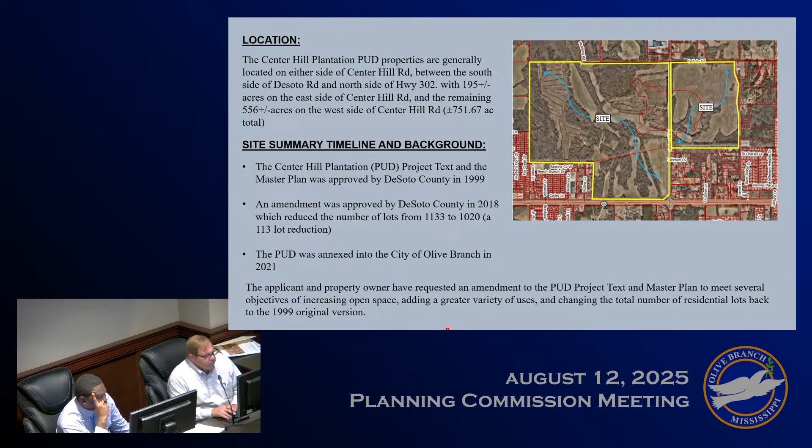I'll continue with the site summary timeline and background. So there has been no development in Center Hill Plantation since its 1999 approval and the 2018 amendment. But with the post-annexation extension of central sewer to the area, development is expected to commence within the next several years.

However, the full program is expected to extend over many years in multiple development phases and will be dependent upon market conditions. It will be further regulated through the city's subdivision procedures, where streets and utilities will be installed and lots platted to allow construction of new homes and businesses. So, what is the summary of the proposed amendment?

Unlike conventional zoning, a PUD project text serves as a unique development code for a project by setting forth permissible uses, bulk regulations, and other standards, such as architectural, to coincide with a PUD master plan. In the case of Center Hill Plantation, these standards are applied to 3 different parts of the overall project.

So Area 1 is right here, here's Goodman Road, here's Center Hill Road. This is the plus or minus 112 acre mixed use area, located at the Center Hill intersection along the north side of Goodman Road. It is bounded to the north by a 75-foot wide power line easement, and here's the easement right here, going all the way like this.

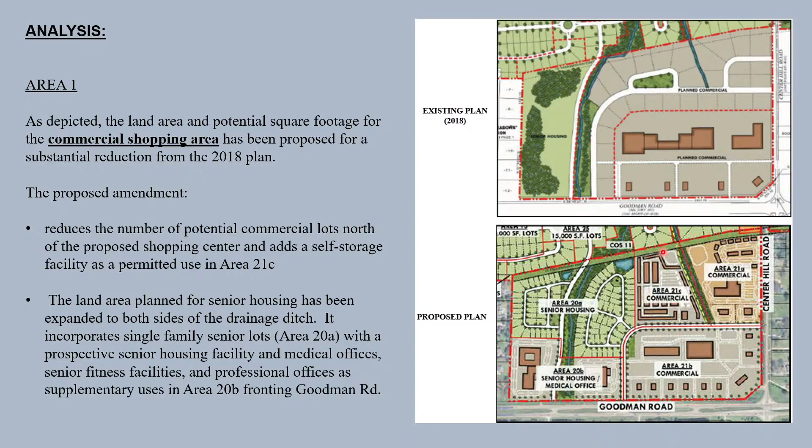So the proposed amendment reduces the number of potential commercial lots, so you can see these will be eliminated, north of the proposed shopping center, and adds a self-storage facility as a permitted use in Area 21C, which would be right here. So they put a proposed self-storage facility.

The land area planned for senior housing has been expanded. You can see senior housing right here in the existing plan. This has been expanded across the creek and to both sides of the drainage ditch. It incorporates single-family senior lots in Area 20A with a prospective senior housing facility, and medical offices, senior fitness facilities, and professional offices as supplementary uses in Area 20B, which is the area that fronts on Goodman Road.

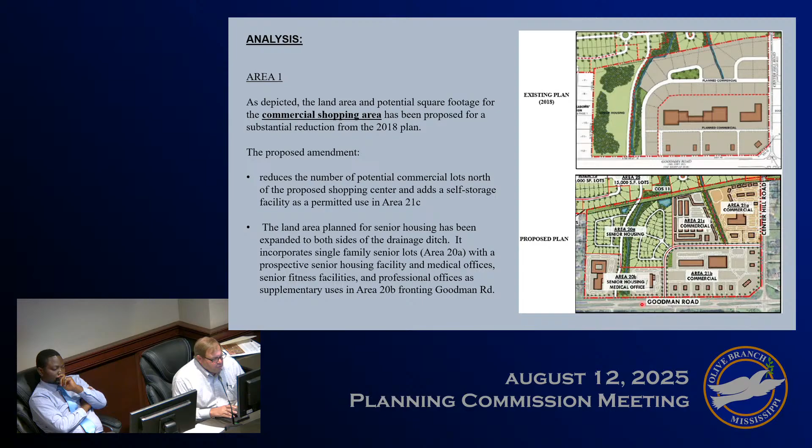Well, I'll continue the analysis. Of course, I'll mention Area 2, which is no change. We'll move on to Area 3.

So the lot layout of a portion of the single-family area east of Center Hill Road will be revised to re-add 110 lots. This would closely mirror the original 1999 PUD lot total. Area 4, which it's a little bit difficult to see, but this is Area 4 right here.

From the 2018 amendment, which contains 156 30,000 square foot lots, will become areas 31. So if you look at the slide below, 31 is all of this, 32 is right here, 33 and 34 are here, which would contain 269 lots for a net increase of 113 lots.

The perimeter lots within areas 1, 2, and 3, so that's these lots along DeSoto Road and along Center Hill, those would remain untouched. They would remain unchanged at 40,000 and 30,000 square foot respectively. So this amendment does not include these lots.

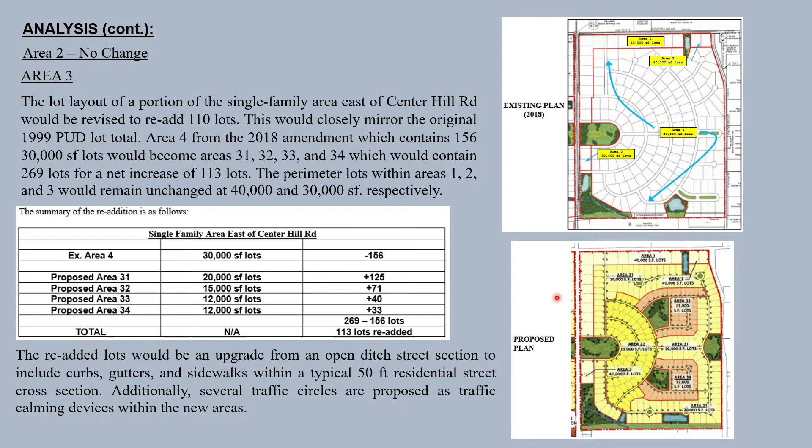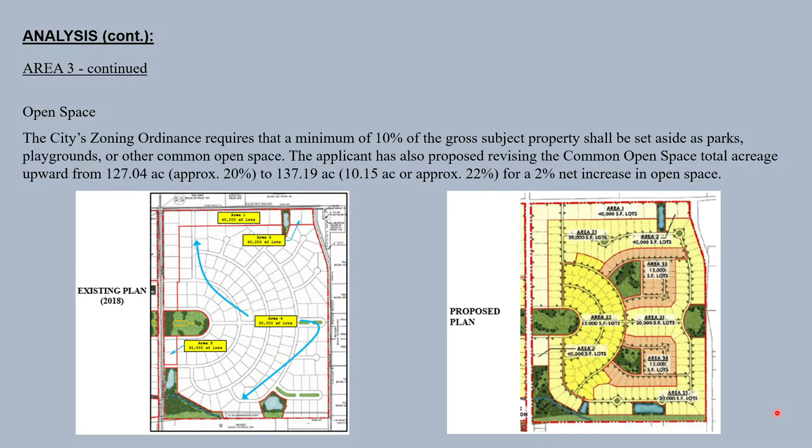So, open space. The city's zoning ordinance requires that a minimum of 10% of the gross subject property shall be set aside as parks, playgrounds, or other common open space for public use. The applicant has proposed revising the common open space total acreage upward from 127.04 acres, approximately 20% of the total development, to 137.19 acres, about a 2% net increase in open space, bringing the total to about 22%.

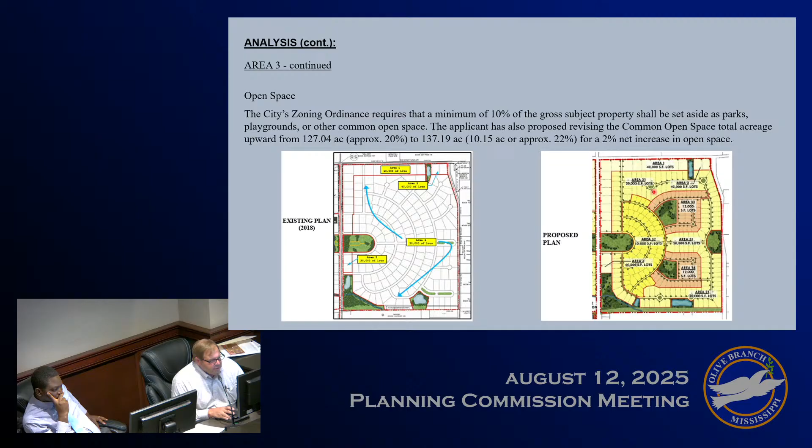You can see the existing plan here on the left, and you can see the addition of this space here and these spaces here in particular, as well as the traffic circles, which also function as some kind of minor little green spaces.

Okay, there are some additional changes. They include identification of any required frontage improvements to Center Hill Road, such as widening, installation of acceleration or deceleration lanes, and installation of curb, gutter, and sidewalks shall be addressed through the Olive Branch subdivision approval procedure for each phase of development. There's also an overall reduction in traffic generation, which would result from the reduction of the commercial acreage.

And within the text, all references to DeSoto County are changed to Olive Branch. So what would the next steps be?

Pursuant to the review and recommendation of the Planning Commission, the Board of Aldermen will be asked to set a public hearing for September 16th, 2025 to review the proposed amendments and consider approval. Development is not expected to proceed for several years pursuant to approval of preliminary and final plats that would allow for construction of infrastructure.

So the recommended motion is to approve the application and recommend that the Board of Aldermen approve the proposed amendments to the project text and development plan for Center Hill Plantation Planned Unit Development with the following conditions.

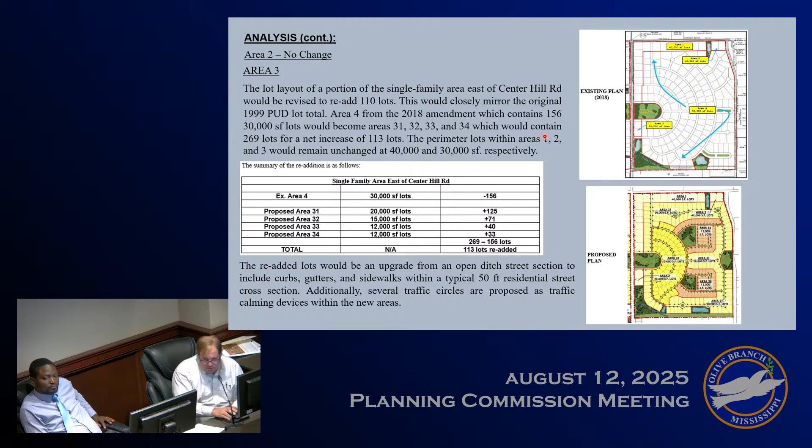Okay, and the only other question I had was on the commercial side. They said they were changing up some of the uses, and I didn't see any of that mentioned in here, on the commercial uses. Well, the commercial use -- was the only thing that they're adding on the commercial side storage units? Yeah, they're putting some commercial, some storage units toward the rear, back in the back. That's a proposal, in addition to age-restricted housing, single-family lots for age-restricted housing, and adding some offices for medical offices and a senior care facility as well.

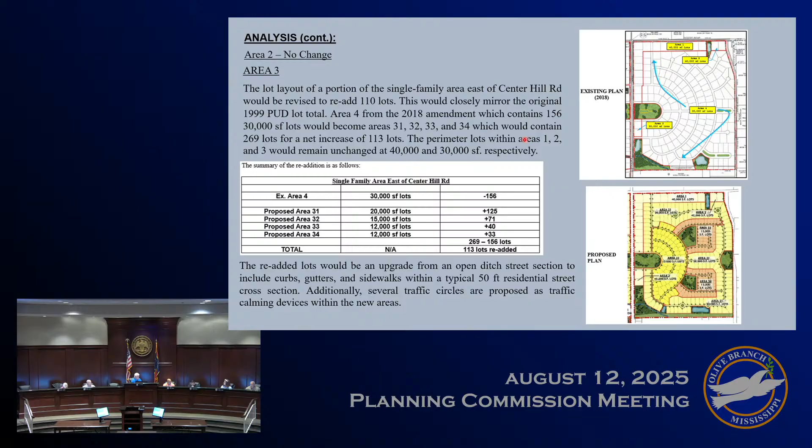Does the current PUD have restrictions on construction? So if we do add storage facilities as a permitted use, can it be a steel building, or does the current language have anything on a percentage of steel or brick? Yeah, they will have to comply with the City of Olive Branch's approval process to comply with the architectural standards. I believe in Michelle's presentation, she'll show you some pictures of what they're envisioning for this storage facility, taken from Collierville. So I think the applicant could probably address that.

All right, thank you. All right, if the applicant would come forward, please.

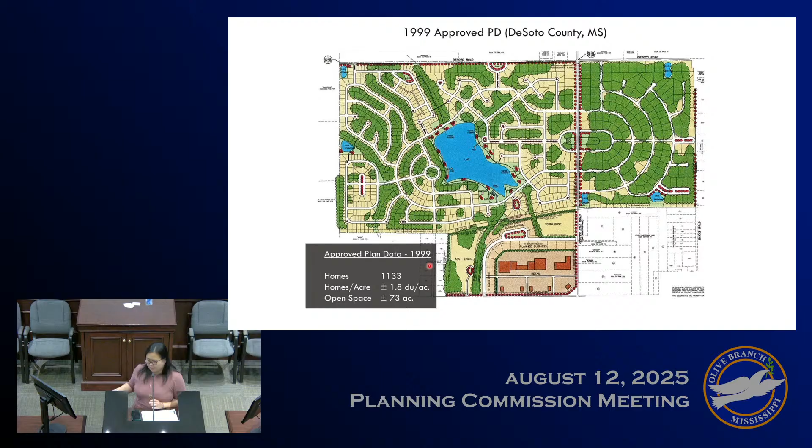Going back through the history of approvals, this is the plan from the 1999 approval. It has, as Kevin mentioned, 1,133 homes with about 1.8 dwelling units per acre and 73 acres of open space.

The 2018 approved plan was done mostly to accommodate some existing site constraints in area 2, which we're not touching with this amendment. Previously there was a big lake, and in the 2018 version the lake was removed for a different type of open space, which ended up dropping the number of lots by 113.

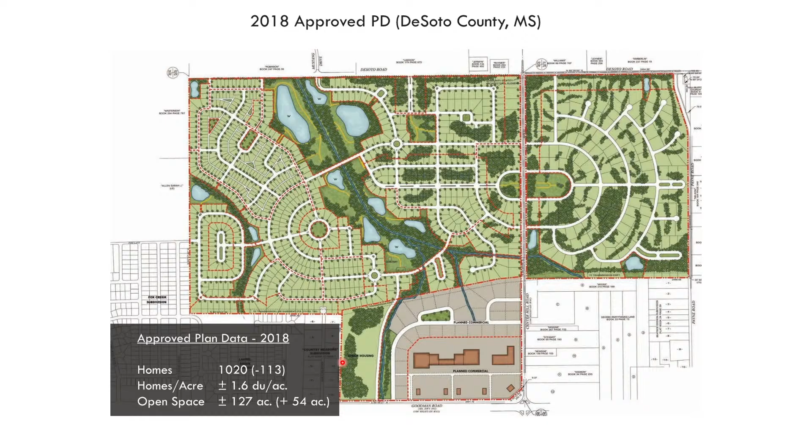In this version, you can see that both what was referred to as area 1 and area 3 — this side and the portion at the bottom — really didn't change much from 1999 to 2018. So now what we're taking forward is refining these 2 areas a little bit more.

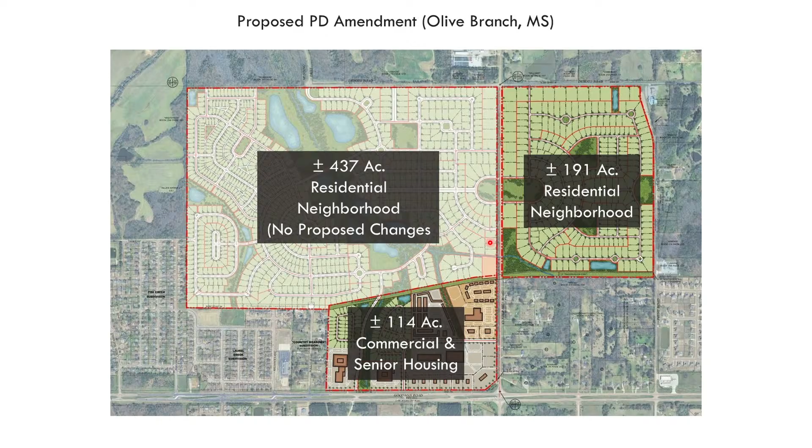We'll go into the residential portion first, this 191 plus or minus acre residential neighborhood. As was mentioned, the outer 40,000 square foot lots are staying the same. Really what we're doing here, in order to bring it into Olive Branch standards with curb and gutter, is needing to mix in some smaller lot sizes.

That also has the benefit of increasing the open space here by roughly 16 acres, and also mixing in a different product type so it can get built out a little faster, with more demand in the market, for instance. So we believe this is a good solution for adapting to the Olive Branch standards versus the standards of the county.

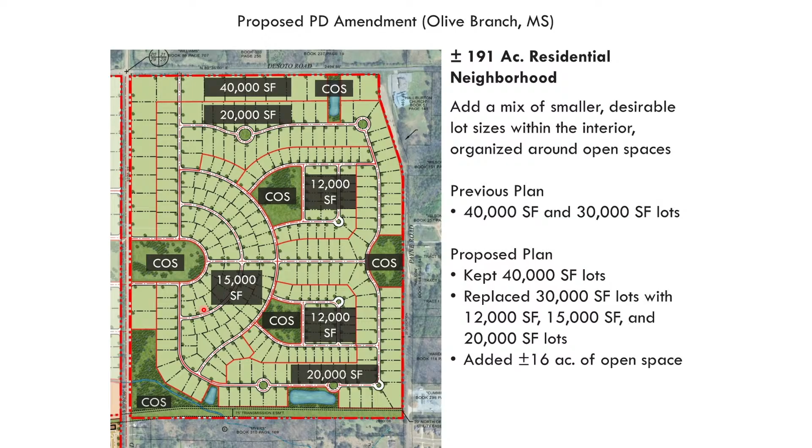And then also going down to that 114-acre commercial and senior housing parcel. As was mentioned in the staff presentation, the commercial area got a little bit smaller, and this is really just to right-size the commercial uses. Before, that commercial area was almost a blank slate, but now that we're starting to think about the types of uses that could be allowed here, we realized that was way too much commercial.

This would be more appropriate to add in some more senior housing and scale back the commercial a little bit. And you can also see where the self-storage is located.

It's really pretty internal to the development, so we believe that the outside impacts are going to be very minimal. And also in the front here is where we were talking about allowing some of those medical professional office uses that would be very compatible with something like a senior living facility.

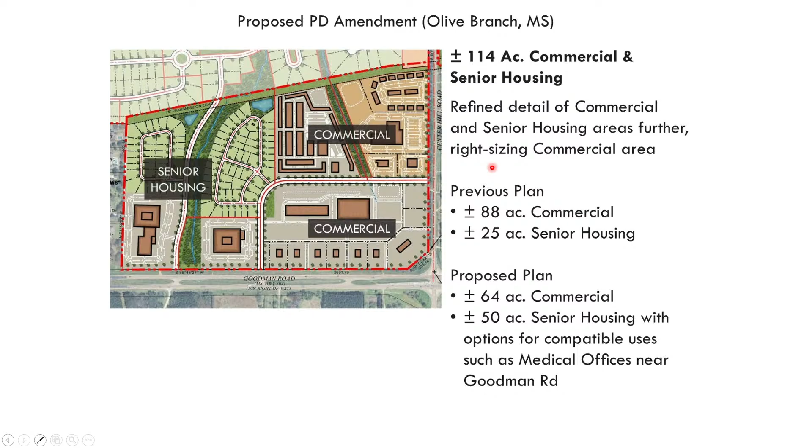So to add all of this together, we're really requesting this change in response to that annexation in 2021 by Olive Branch. We're responding to the surrounding development that has happened in the area and current market demand, and especially costs of building a home. And then also the donation of the 2 acres, shown in that orange block right here, for the Olive Branch Fire Station.

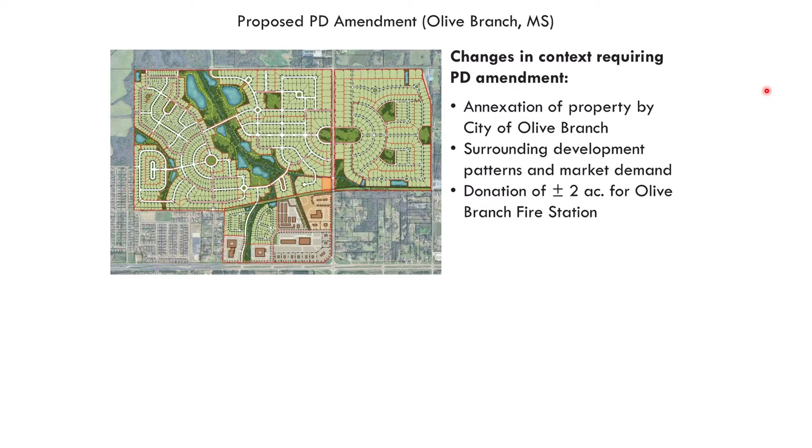And the overall impacts of this amendment, we are increasing the amount of open space, roughly 64 acres above the 1999 plan and about 10 acres above the 2018 plan. That 10 acres is really a minimum. There's about 16 acres that we're adding in this area. There was about 6 acres of miscellaneous open space that we decided not to include in that overall total. So it's really kind of a conservative number there.

And then it increases the development feasibility by mixing in some different lot products and different commercial uses, and really kind of takes a more detailed look at the commercial area. And also, it keeps the number of residential lots and density the same as the approved 1999 plan.

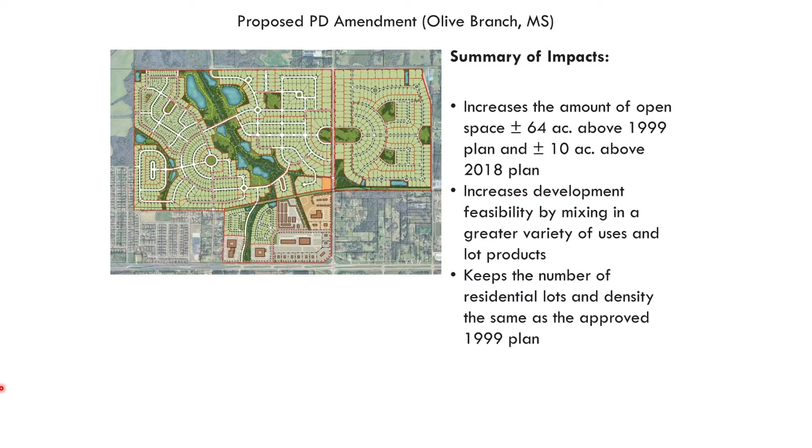So really, we believe that the impacts from bringing it back to that number of lots is in line with keeping this development really the same as it has already been approved, but designing it to be a little bit better, increasing the amount of open space and the number of open spaces, and then also just responding to what Olive Branch wants and needs.

So with that, I can answer any questions or go into additional detail on anything. Any questions of that?

Yeah, I do have one. Really the same thing that I asked staff earlier. What's the plan to mitigate some of those curb cuts on those larger lots? Because if we have like 20 curb cuts coming out into Center Hill, that might be a bit of an issue.

Yeah, so the plan for that is that these lots, the 40,000 square foot lots, would access off of the exterior streets, so DeSoto or Center Hill Road. But where possible, so for example here, where we do have a side street, we're going to access off of that side street.

That side street would cover just that one lot in the front, right? And that, just that corner lot? These two lots plus these two. Yeah, and then every other lot would have a curb cut onto Center Hill, right? Yes, and that's as it was originally approved as well.

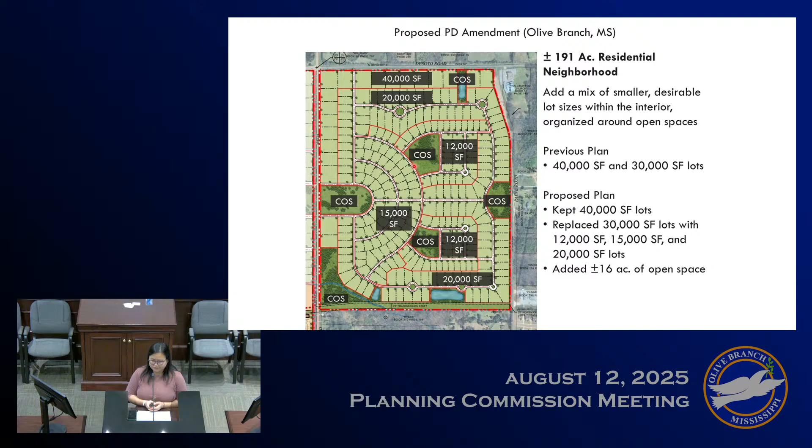Any other questions? No further questions, and thank you for your comments.

Okay, we will now open it for public discussion. And once again, limit your time to 3 minutes or less, and please try not to be repetitive. You only have one trip to the podium. So now I will open it. If anyone wishes to come forward, please come forward and state your name and address.

How's it going? Jeffrey Ferguson, 7255 Rollins, right there. What's your plan for the traffic on Center Hill? You got all these roads cutting into the driveways. You need to make that a 4-lane.

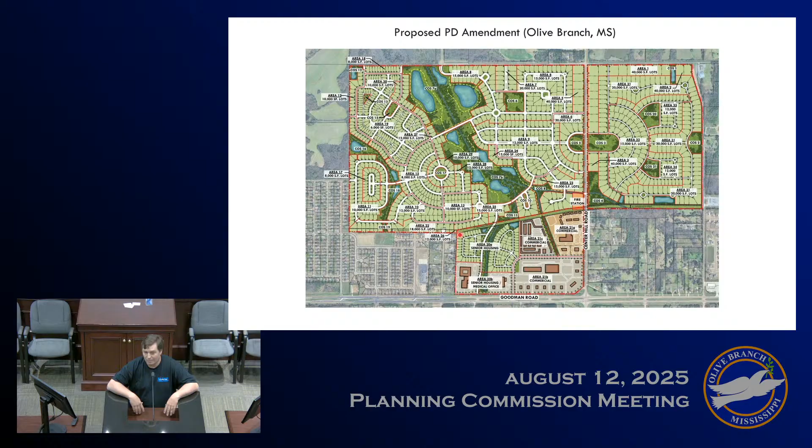That will be the issue before the aldermen, when it comes before them. That will be their question. And we may have had some traffic counts. I don't know if we had any traffic counts on this. Because the traffic's already bad enough as it is through there.

Sir, would you care for me to answer? Yeah, the city's long-range plan has Center Hill Road as a 5-lane section. And one of the items that was incorporated into the PUD project text, we added some language that would essentially, through the platting process, have the developer make improvements along Center Hill Road, frontage improvements along Center Hill Road as it was built out. So it would definitely be widened, particularly down abutting the commercial area.

And then as you went farther up the road, again the idea being you'd have a center turn lane there. So even if it wasn't completely improved to a 5-lane section, maybe there's a possibility of doing some deceleration lanes, you would at least have a center turn lane so people would be able to make left-hand turns in and out of their garage.

So there is language in that project text that does address the traffic issue on a more specific basis, but as the project moves forward and gets into platting phases, which would come through the Planning Commission, you'd be able to look at the actual details. Right now we're dealing at a higher level with just the zoning issues, and as you get more specific, you'll get more into those details. But yes, there are provisions being made in what you're seeing tonight.

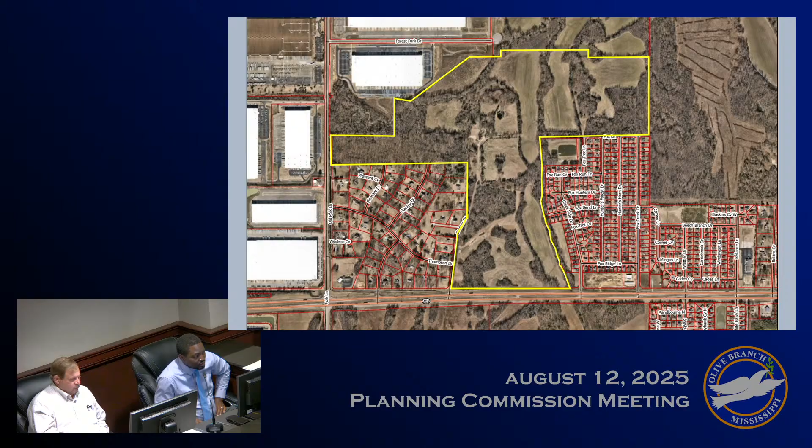Thank you, Mr. Chairman. Planning Commissioners, before you is a request to consider the amendment of the Kirk Farms planned residential development. This is the subject 234 acre piece of property. It is located north of Goodman Road, Highway 302, east of Polk Lane and Plantation Grove subdivision. Fox Creek is further to the east of this particular site.

Just to give you an idea or history of the project before you for amendment: on March 19, 2024, the Board of Aldermen, following a recommendation from this Planning Commission, approved the project text and preliminary development plan for Kirk Farm Planned Residential Development, after the board requested a number of changes to be made. This is the layout of the preliminary development plan that was approved by the Board of Aldermen, a concept plan showing the streets and street connections. The proposed plan before you is basically what it will look like.

I will touch on the main changes proposed for adoption. First, the total open space will be increased from 72.44 acres to 75.14 acres. So the total amount of open space, shown here in green, to some extent also includes the areas shown in blue that are intended for stormwater management.

A lot of that addition comes from this area. If you look at this plan, you had lots in this particular area. In the new plan, you don't have any lots there, so that has added to the total green space count of this subdivision.

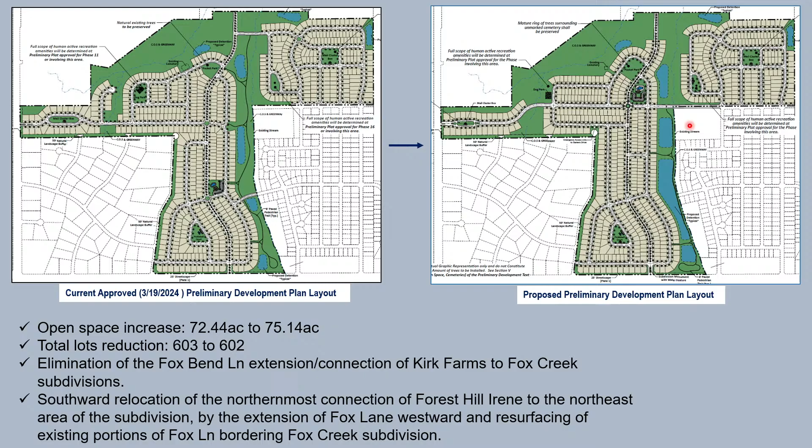Another change: the southward relocation of the northernmost connection, which is what I just mentioned. This connection here will be relocated to become the Fox Lane extension.

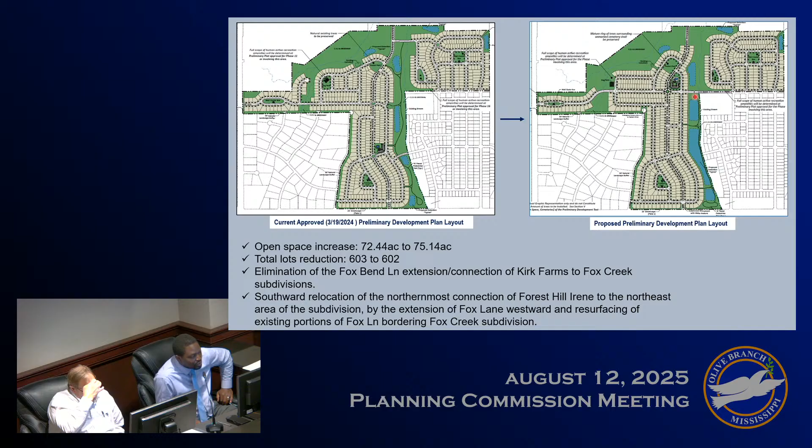There will be an increase in the aggregate size of lots in the entire subdivision. If you take the sizes of each of the lots in the different districts as proposed, the aggregate will actually increase. There is a tendency in the city for the Board of Aldermen to want lots to be larger, so this is actually in line with that desire in the city. This results from a reduction in the total count of the minimum 6,000 square foot lots.

So these lots shown here in yellowish color are your minimum 6,000 square feet lots at the center of the subdivision. Their total count is being reduced from 173 to 159, which means the lot area that was occupied by those small lots is now being added to some other lots, making those other lots larger in size.

A lot of that addition is in the 7,200 square feet lots, what was called the neighborhood lots, shown here in this column. Those lots will increase in number from 243 to 343. That's an addition of 53.5 to 56.9%.

There will be a minor reduction in the total count of your minimum 10,000 square feet lots, shown here in yellow. Really the reduction is in this area, that's where you have the minor reduction. So if you see, you're going from this to this. The perimeter lots remain the 10,000, still the same, no change.

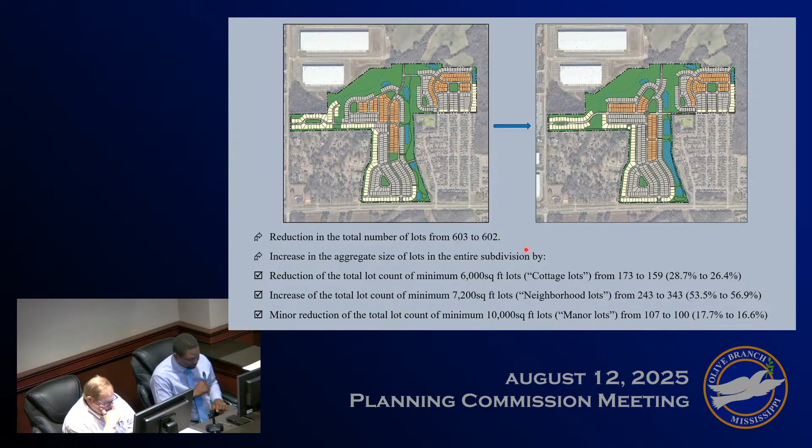With regard to utilities and amenities in the subdivision, all amenities are maintained. Pickleball courts, swimming pools, the 8 feet wide pedestrian trail, all those amenities are maintained. The only difference is that their construction will be moved from one phase to another.

For example, initially the swimming pool was in phase 1, that will be moved to phase 2, but you still have a swimming pool. It may even be better to have it in phase 2 than phase 1, because with something like a swimming pool, you need a good number of residents already in the subdivision using and maintaining it. You don't want to build a swimming pool where nobody has bought a lot yet. We had that problem in Villages at South Branch. So moving it to phase 2 is actually a better design option.

The pickleball court that was in phase 3 is moved to phase 4. The 8 feet wide pedestrian trail that was in about 4 different phases will now be completed in 2 phases. Its total length will be reduced because here it extended right up to the northern portion of Forest Hill Irene Road, but with the extension of Fox Lane, it's going to terminate there. So the length may reduce by about 500 to 1,000 feet, but you'll still have about 3,000 feet of that 8 feet wide pedestrian trail constructed.

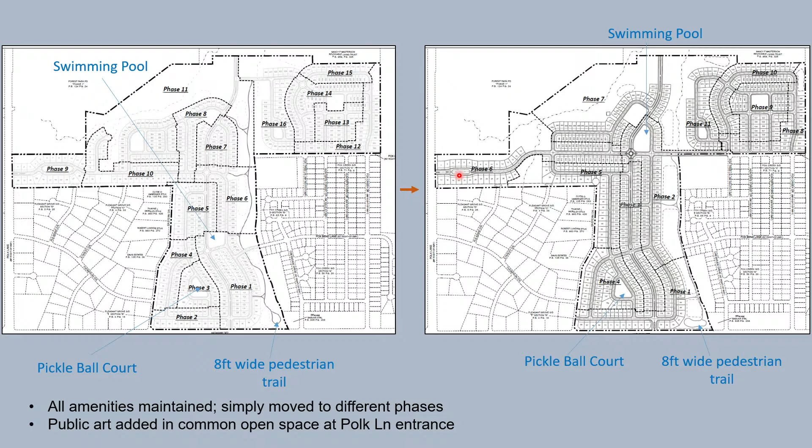An addition in terms of amenities will be a public art installation in this common open space, which initially was conceived to be in phase 9. It will now be in phase 6. This common open space at the entrance from Polk Lane has an additional public art added to it. So this is a better look for this subdivision that is being proposed.

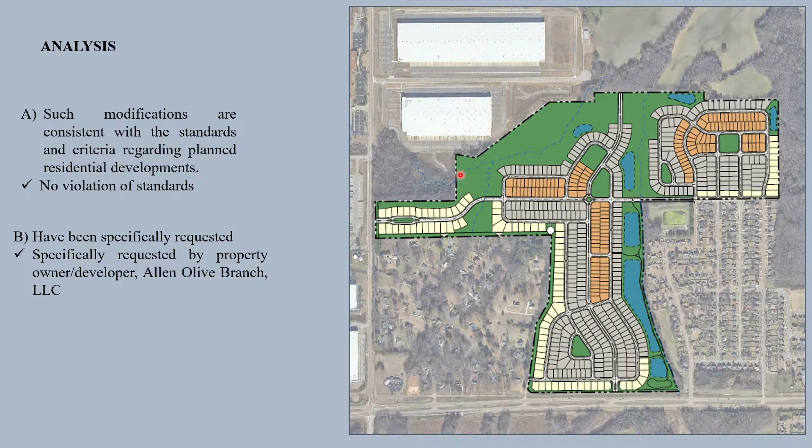The zoning ordinance provides criteria for reviewing amendments or modifications from base standards in planned residential districts. The first is that such modification should be consistent with standards and criteria regarding planned residential developments. The proposed amendments do not violate any such standard. For example, the minimum required open space is supposed to be 10% of the entire development; this is 32%. So none of those standards are violated.

The request for the amendment must be specifically made by the property owner or developer, and that is the case here. These amendments have been requested by the property owner, namely Allen Olive Branch LLC. So those two conditions are met.

The third condition has very many other criteria under it. No modification of the baseline regulations and standards will be allowed when such proposed modification results in inadequate or unsafe access to the proposed planned development.

So this is the site that we're looking at. In terms of accessibility to this site, there is an existing traffic light at this location, a new one that was put in on Brabant, that is where the traffic light is located. And then this is where we talked about a gas station under construction, right there is an R-cut, you know, you cannot make a left turn.

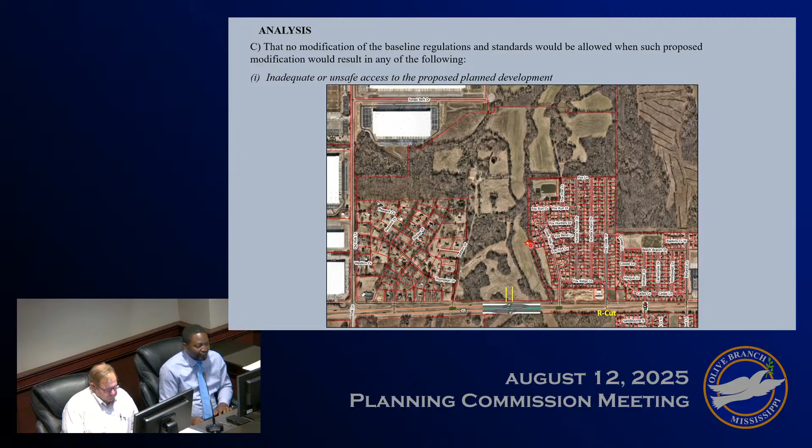The only two things with respect to access to the proposed development that are changing have to do with Fox Bend Lane, which was initially approved to be extended into the subdivision and connected down in this area into Pleasant Grove subdivision. That connection will be eliminated, and I will explain that down the line. Secondly, you just approved the project text amendment for Center Hill Farms, Center Hill Plantation, which is this particular subdivision here.

One of the things that will be good for the city is, in order to alleviate traffic on Goodman Road, an east-west minor collector road can carry traffic from Center Hill Plantation, all those residential lots, whether the new ones being proposed today or those to the west or east, including Fox Creek and Kirk Farm, to Polk Lane, especially with the industrial development along Polk Lane. That's a lot of workers' population you can have there. This Fox Lane minor collector road addition will provide an opportunity to move that traffic to Polk Lane and back to Center Hill Road without having folks go down Goodman Road.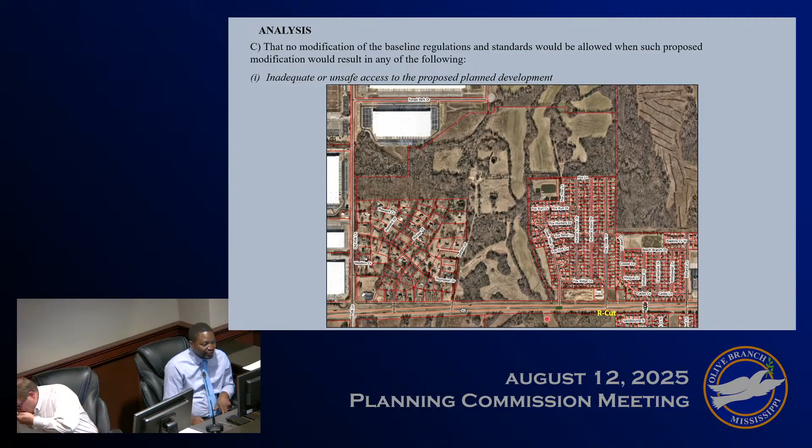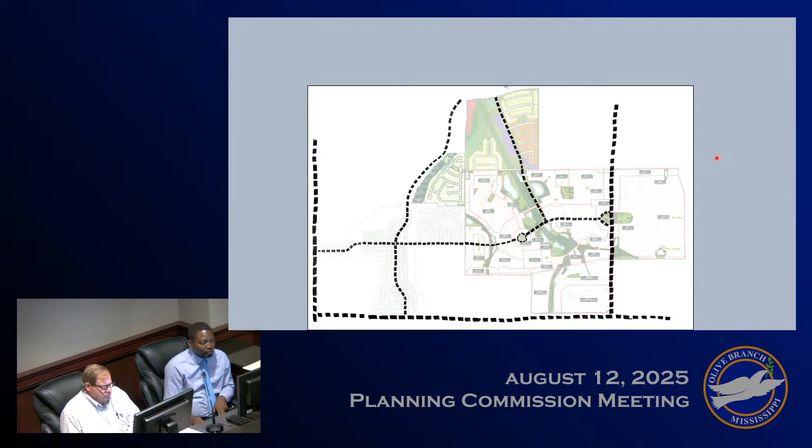So it will significantly alleviate traffic on Goodman Road. It is on this basis that the proposer has basically aligned Fox Lane as it is currently proposed. It is the opinion of the city engineer that this is a better option for traffic management in the city.

Fox Lane, therefore, would be constructed with a 60 feet right-of-way, a 2-lane road with a bike lane added. Right now there is no bike lane in that whole area, so this will basically be a kind of complete street. You have a bike lane added, a grass strip, and a 5 feet sidewalk on both sides. So it will be a road that can handle cars, pedestrians, and bicycles in that particular area, and this can provide an opportunity for the city.

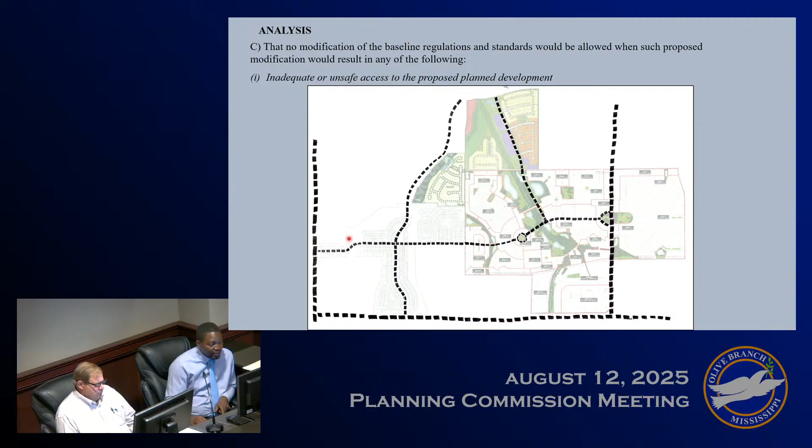If Fox Lane is finally fully extended with that cross-section from Polk Lane to Center Hill Road, and then on to DeSoto, you can actually have a bike trail network that goes around this particular neighborhood in the future.

The second condition is that traffic volumes should not exceed the anticipated capacity of the proposed major street network in the vicinity. The only way traffic volumes could be exceeded is if the number of lots were increasing beyond the proposed road capacity network. In this case, the number of lots is actually reducing by one, so the traffic volume is not expected to increase. There will be no impact with respect to this condition.

Third, an undue burden should not be placed on public parks, recreational areas, fire and police protection, and other public facilities which serve or are proposed to serve the planned development. All amenities approved in the subdivision are being maintained, so there will be no additional burden on any public parks, and the recreational facilities are being maintained.

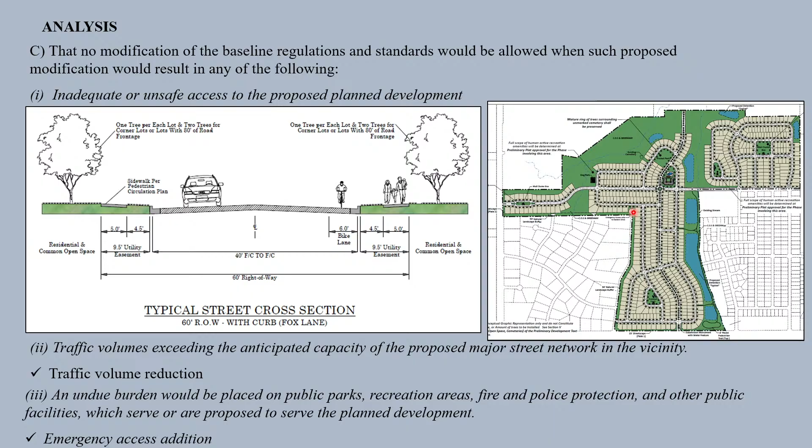With respect to fire and police protection, this amendment will include the addition of an emergency access point on Eastern Drive. Eastern Drive will not be connected; it will still remain shut off with a cul-de-sac. That white spot there is the cul-de-sac. Eastern Drive will be shut off.

What you will have is a little 10-foot-wide emergency access, only to be used by police and fire trucks. For example, if there was a fire along Eastern Drive and a fire truck was inside Kirk Farm, that fire truck would be able to come there, open it up, since it will be shut off otherwise.

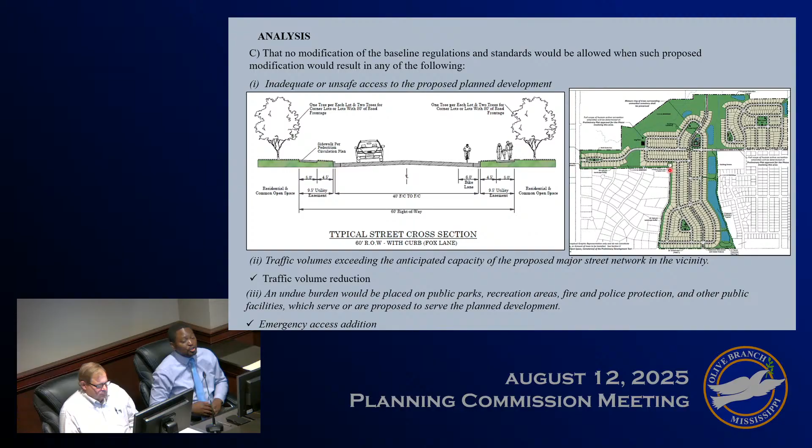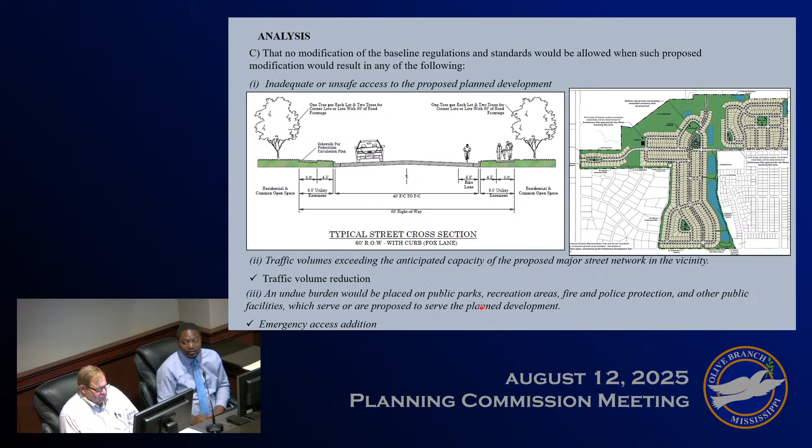The general public cannot access it. Only the fire department will be able to open that, come in, put out any fire in Pleasant Grove subdivision, and go back. That will increase protection for Pleasant Grove subdivision. It will not be used by the general public; that is only an emergency access for police and fire, basically emergency services.

The fourth condition requires that a development which will be incompatible with the purposes of the planned residential development or the town's adopted general plan will not be approved. The purpose of planned residential development is essentially to provide flexibility, and this does not violate that principle of flexibility.

And lastly, any proposal that will pose a detrimental impact on adjacent properties or the surrounding neighborhood will not be approved.

Following the approval of this project text in 2024, one of the conditions was for the developer to complete the floodplain study and submit that study to FEMA. That study has been completed and submitted to FEMA with regard to establishing the floodplain limits on Fox Creek. Right now, the study only ended at about this area.

That study has been completed, and one of the things it shows is that if Fox Lane were extended as it was initially proposed, you would have to build the road higher. There is a very high risk that the box culverts there would cause water in that creek to back up, and a significant risk it may potentially flood these two houses at this location during a significant 100-year storm, especially if the Sanders property to the south was developed to some extent. That is one of the reasons the developer is proposing to avoid that connection — to protect those surrounding houses from flooding.

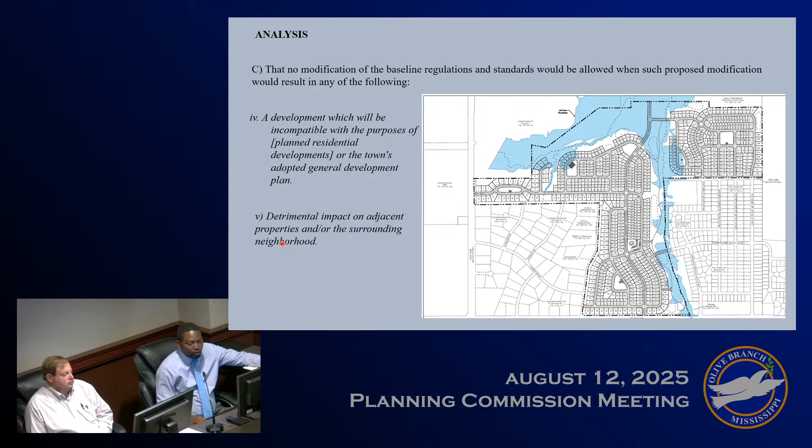In this regard, the proposed amendment aligns with condition number 5, or conforms. Staff therefore recommends, based on the finding that the proposed amendments meet the review criteria for modifications regarding planned residential amendments, that the Planning Commission approve the proposed amendments to the Kirk Farm project text and preliminary development plan, and recommend it to the Board of Aldermen subject to one condition: that all improvements shall be the responsibility of the developer and not the city of Olive Branch, including all improvements on Goodman Road. That concludes staff's presentation. Thank you.

Okay, any questions of staff? I've got a question — could you go back to the phases?

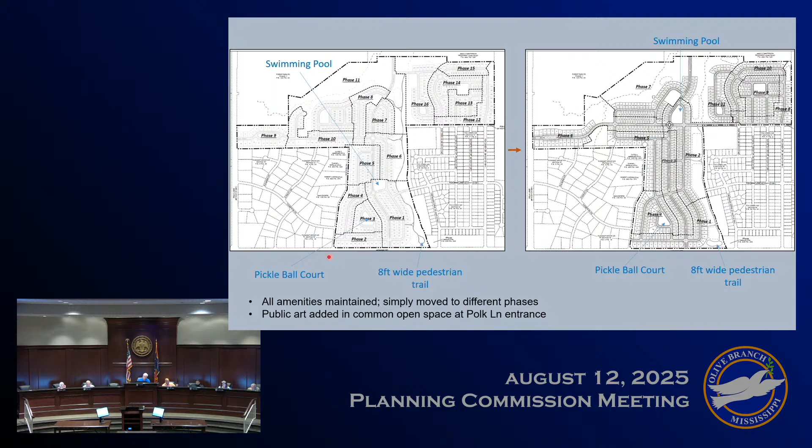My question would be, at what phase do we have two access points — not including the emergency one? Initially, you were going to have two access points in phase 1, on Goodman Road and on a Fox Bend Lane connection. Now the two access points will be in phase 2, so phase 1 will be this connection — this is your phase 1 down here.

Your next application is actually the preliminary plan for phase 1, so you have the connection onto Goodman Road. Then in phase 2, that's when you will have the Fox Lane connection to Fox Creek. Okay, so that will happen in phase 2.

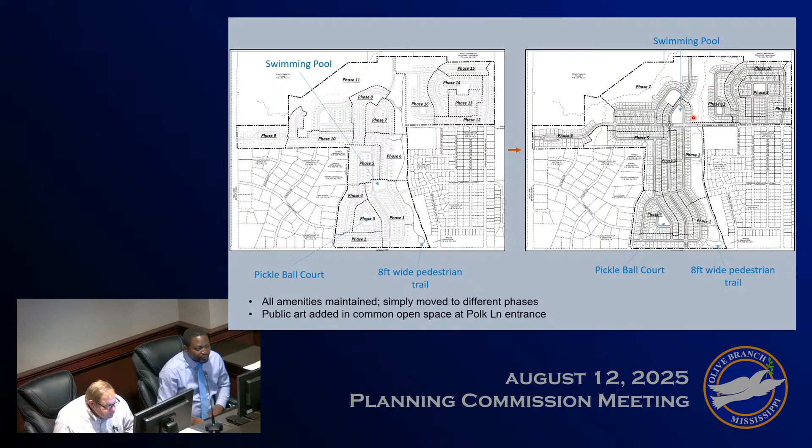Thank you. Welcome, sir. Any other questions? There's no further questions. Do we have someone here to represent the application?

Henry Porter with W.H. Porter. We generally agree with anything that the staff had recommended, and we were open to any questions that y'all might have for us. Any questions of Mr. Porter?

No questions? All right, I will now open it for public discussion, public hearing. Is there anyone here that wishes to speak in favor or against this application at this time? All right, if you'll come forward, please, and state your name and address.

David Grisham, 7380 Pleasant Drive. We were talking about turning left into the subdivisions, and I know that Eastern Drive is one of them. What about Stanley Drive? You can still turn left in there, or is that going to change?

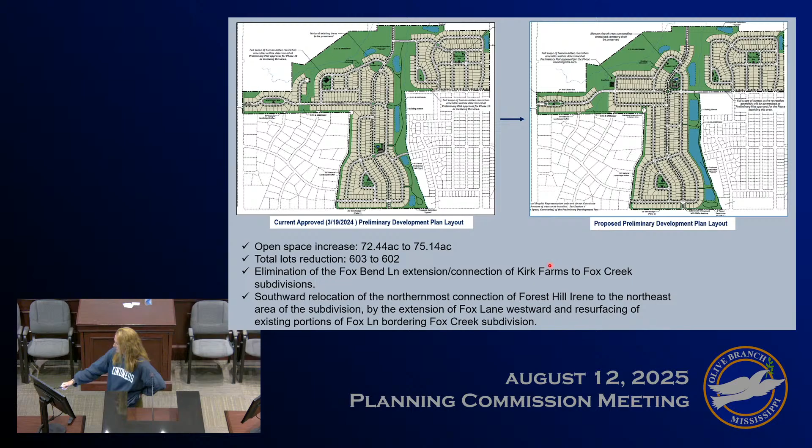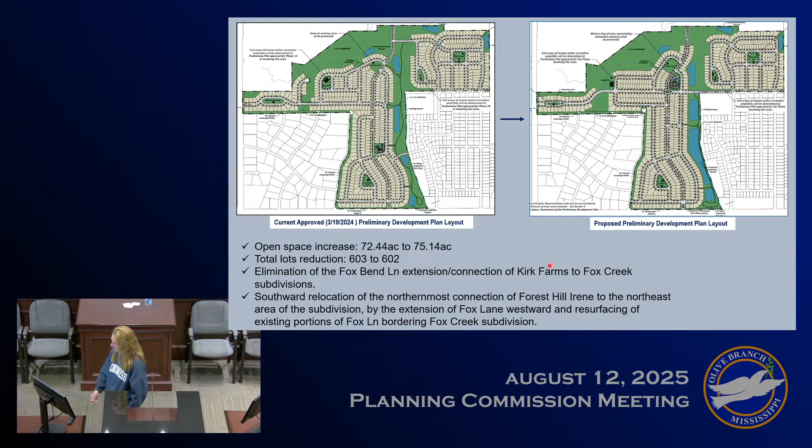Yeah, that's good. So maybe, like she said, consider adding some greenery, because they've torn that all up on the end of ours. Yeah, on the end of Stanley too, they just kind of plowed right through. I assumed it was the sewer and water people doing that, but yeah, it is sad, because it was a bunch of big tall trees. Okay, thank you. Anyone else?

No, no sir, I'm sorry, you only have one. Good evening. My name is Abraham, and I own the development east of the property they're developing. I don't have a problem — I've seen a lot of development they did in Marshall County, they do a good job. But I'm worried about the access going to my property.

I have a commercial property there, and I just put up a $4 million building that I have a mortgage on. From what I see, Mr. Sang told me that both accesses only go west, leaving the subdivision. That's going to affect the value of my property and also affect the development. I don't know if the city proposed it to the highway department, and I don't know who proposed that, or how the highway department will respond. I've never seen it done anywhere in Goodman, but at this site, just in front of Brayborn and Fox Creek subdivision.

I mean, what do we need to do to fight that? What am I going to do? I'm going to be landlocked. There's no traffic going in — they go in and then have to go back 1.5 miles to get back toward the school or toward the other four subdivisions around the area. I think that needs to be addressed. I don't know if you guys discussed it with the highway department. I'll let staff address that if you wish.

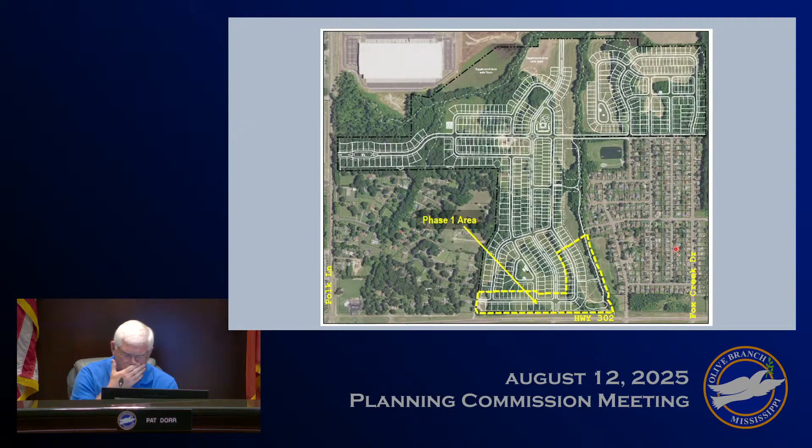We're going to have the staff presentation. Before you is a request to consider the preliminary plat for Phase 1 of the Kirk Farms Planned Residential Development, which the project text amendment you just recommended for approval relates to. It will consist of 53 lots in this area marked in yellow. You'll have the street connection to Eastern Drive we discussed, the entrance coming in from Goodman Road, the amenity sign with a water feature, and a portion of the trail constructed in this Phase 1.

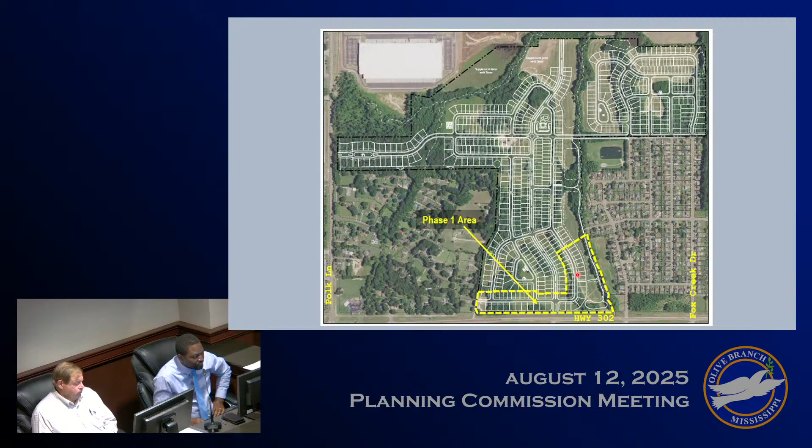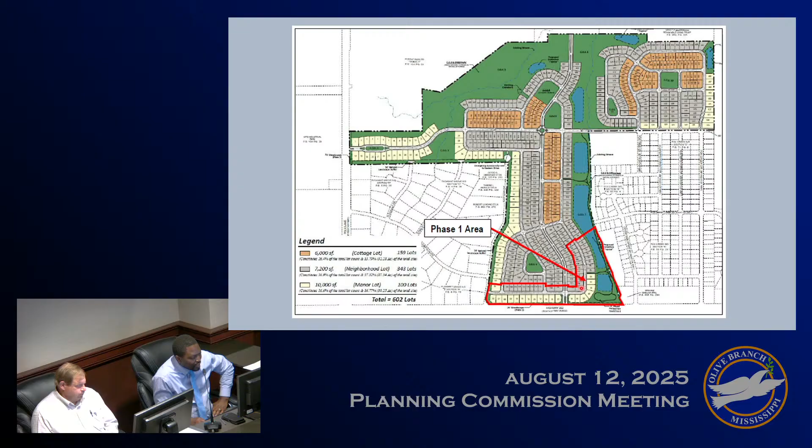These are the lots. There are 2 main types in this area: neighborhood lots, minimum 7,200 square feet, and lots of minimum 10,000 square feet that will be back in Goodman Road. Those are the 2 main lot types constructed in Phase 1 of the subdivision. Stormwater management will also be provided. This is the preliminary development plan of the subdivision as proposed. Staff recommends approval. The subdivision plat does not violate any provisions of the subdivision regulations or zoning ordinance to the extent that the project text amendment as proposed is approved.

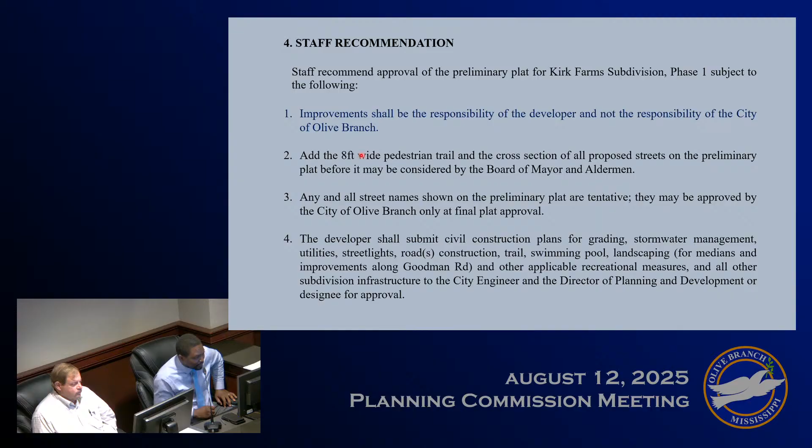Staff therefore recommends approval subject to a number of conditions, a few to highlight. Condition number 1: all improvements shall be the responsibility of the developer, not the city of Olive Branch. Condition number 4: the portion of the walking trail within the area of Phase 1 of this subdivision must be constructed before approval of the final plat of this phase. A walking trail is not the same as a swimming pool - all of that can be done with the grading and construction work that is going on.

Condition number 8: we need to see an MDOT permit submitted to the city engineer for new street connections to Highway 302 before the commencement of construction. Any and all improvements required along Highway 302 by MDOT shall be completed by the developer.

Condition number 11, which I propose to delete - this was inadvertently left from the old approval. It had to do with the provision of a traffic circle, and in Phase 1, a water feature that has been moved to, I think, Phase 4 or 5 of the project. So the proposal is to eliminate condition number 11.

Condition number 14 had to do with the developer making a cost-sharing contribution with regard to the provision of sewer in that particular subdivision. Construction is ongoing already, as you heard from the neighborhood - those lines are being installed. The shared agreement had already been worked out with the developer, approved by the Board of Aldermen.

The city engineer recently discovered that when they did the construction plans, the line providing access to this subdivision, initially thought to be maybe a 6 or 8 inch line, is actually a 10-inch line. It's larger, so it can service the subdivision, and as such there may be a need to modify or nullify that agreement. The city engineer is working on that, so condition number 14 is maintained for that reason. That concludes staff's presentation. Thank you.

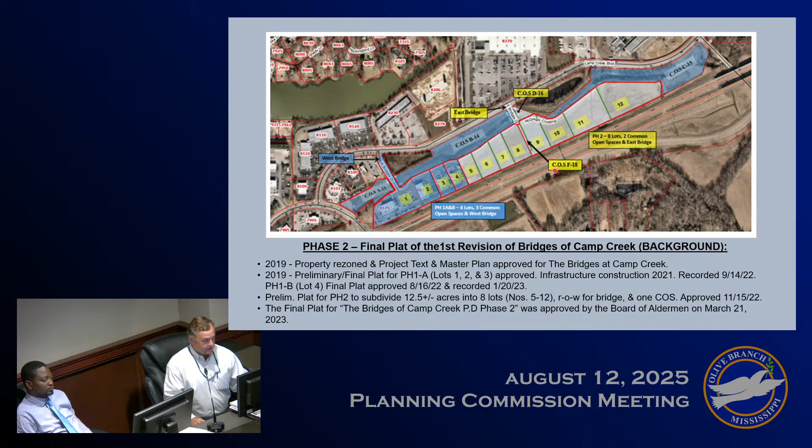Thank you, Mr. Chairman. Before you I've got a background along with an aerial view of where we're looking, as everyone is familiar with Chick-fil-A and Lowe's at Camp Creek. If you follow the cursor off of 302 around to Camp Creek, you'll notice you're in front of Lowe's, lots 5 through 12 — that's what we were talking about this afternoon. Common open space F18 will be our subject. As you can see, there's a background from 2019 up to the final plat. The Bridges of Camp Creek PD Phase 2 was approved March 21st, 2023.

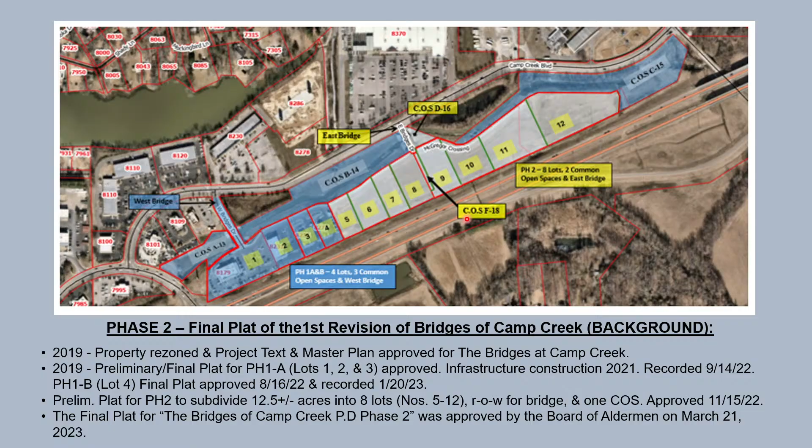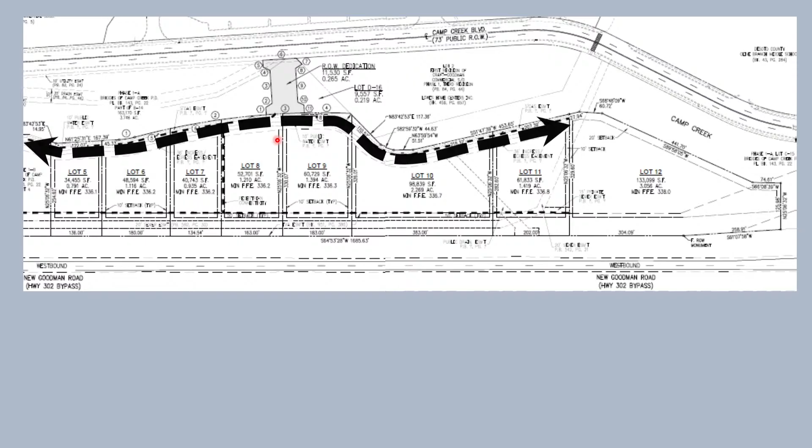This in front of you is a depiction of the plat. As you can see, the right-of-way was dedicated here for the bridge. The preliminary or final plat approved had lots 8 and 9 in front of the bridge with no common open space between them. There was a road in front of 5 through 12 along to 1 and the western bridge. This came off of the 3/14/23 PowerPoint slide. With not all end users identified, lot lines may need to be adjusted versus how they will be recorded on the final plat, and that's what we're seeing today.

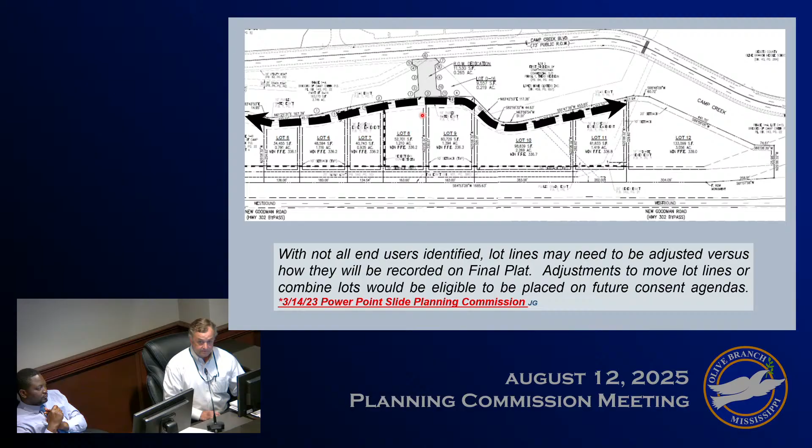We see a common open space added and a couple of lot lines adjusted. Adjustments to move those lot lines or combine lots would be eligible to be placed on future consent agendas — just wanted that noted, that was from 23. Again, we're at the first revision of this final plat. It depicts a 36-foot wide ingress-egress easement that extends across the north side of proposed lots, ending at lot 12. The east bridge is directly across from Lowe's.

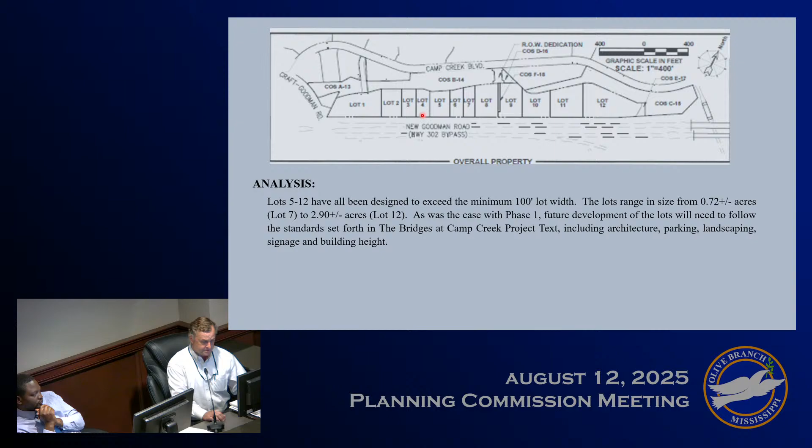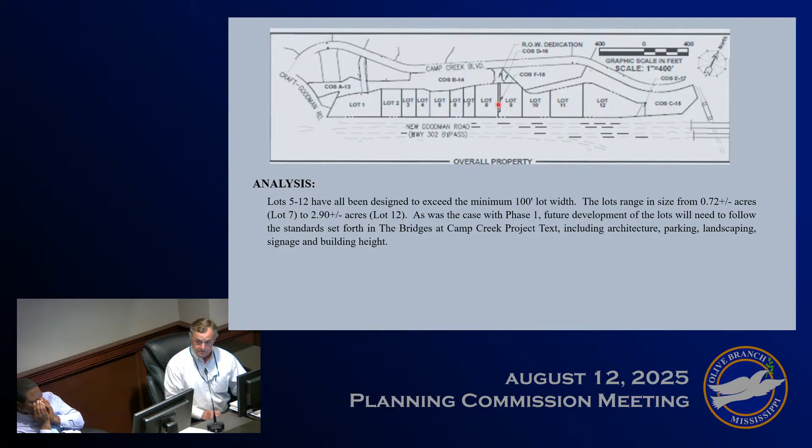It's located on 0.265 acres. It's public right-of-way. It splits a common open space now called COS F14, platted as part of Phase 1. Phase 2 contains a private drive as a common open space. I apologize, I got ahead of myself — it was first platted as COS B14. This is COS F18, going to be between lots 8 and 9 as depicted here where my cursor is, located across from the bridge. The reason we're doing this is a restaurant is proposed for lot 9, so there will be some access for a restaurant.

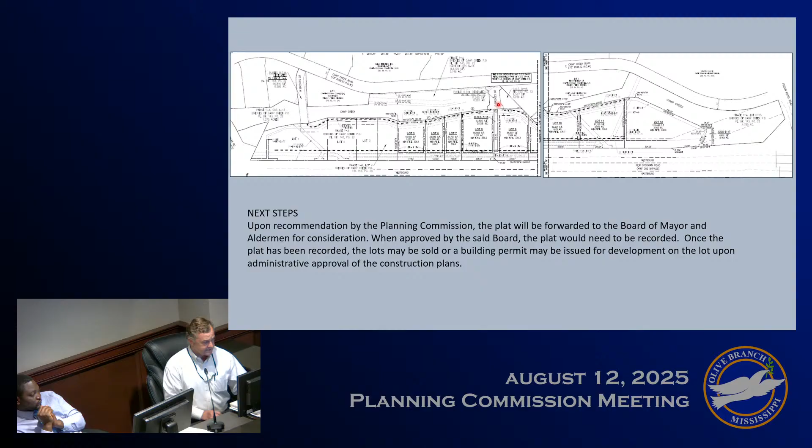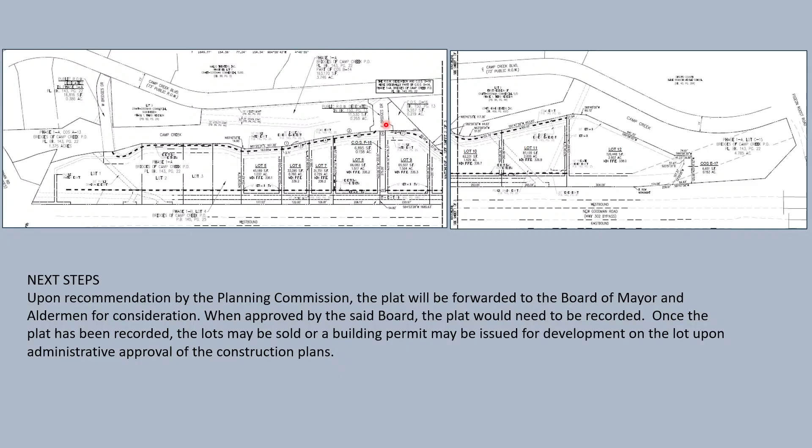Here is the final plat along with our next steps. The plat will be forwarded to the board of mayor and aldermen for consideration. Once approved by the board, the plat would need to be recorded. Once the plat has been recorded, the lots may be sold or a building permit may be issued. Our staff recommendation — I do want to bring your attention to number 4: the final plat must be recorded before any building permit may be issued on a proposed lot. Again, we talked about that common open space being added to possibly entertain a restaurant. So that concludes staff presentation, happy to take your questions.

Any questions of staff? No questions then. Do we have someone here to represent the application? I'm Mike Davis with the Reaves Firm, 6800 Poplar Avenue in Memphis. We're in agreement with the staff conditions, and I can certainly answer any questions you have.

Okay, any questions? Are you at liberty to say what restaurant is coming in? I am not. I didn't think so, but I thought I would ask. You always ask me — it's a national brand, though. That's fantastic, well it really looks nice there. I just want to tell you, we're proud of the development picking up momentum, too. Okay, thank you. Anybody else? Thank you, sir.

Public discussion, anyone here wish to voice their opinion for or against it? I don't see anybody here on that, so I will now close the public hearing.

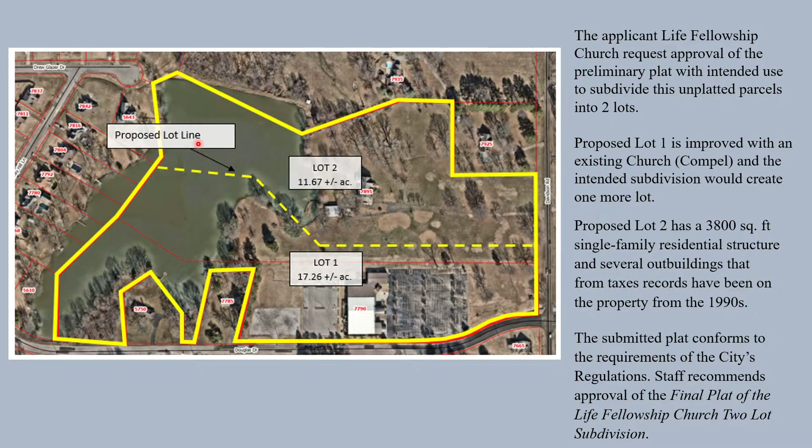Before you is an aerial map with the new lot lines depicted. The perimeter lot line stays the same. The interior lot line that used to run east to west, then northwest across the lake, now moves east to west around the peninsula and up to this corner. The proposed lots 1 and 2 do meet the 1 acre requirements within the agricultural residential district.

Both proposed lots have access to Davison Lane. Rural open swale sections are permissible, so no infrastructure is needed, and no sidewalks are required. The submitted plat conforms to the city's regulations. Staff recommends approval for the final plat of the Life Fellowship Church 2-lot subdivision.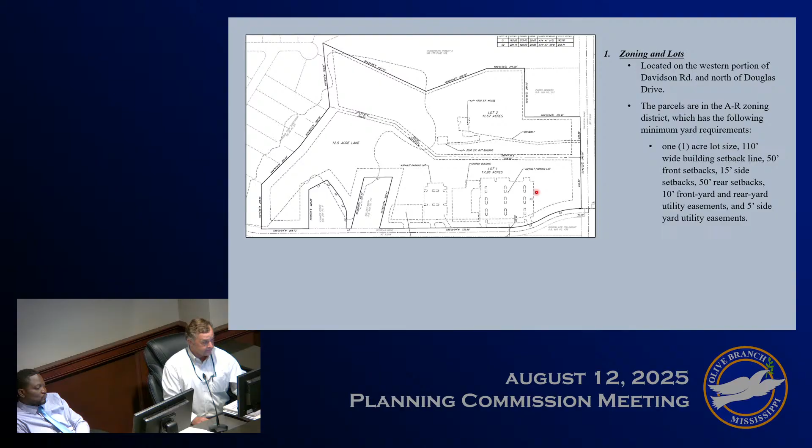Here is what was sent to us by Civil Inc. I had them add where the home is for ease of use—this is an existing home. The proposed lot 1 is here, with an existing home and an outbuilding. This is the church, with parking lots around it depicted with islands and access along Douglas Drive for the church.

Proposed lot 1 is 17.26 acres, and proposed lot 2 is 11.67 acres. Both lots are zoned AR, requiring a 50-foot front yard setback, which they meet except for the church—which we as staff will address at a later time—a 15-foot side yard setback, and a 50-foot rear yard setback. The plat does meet the zoning requirements generally.

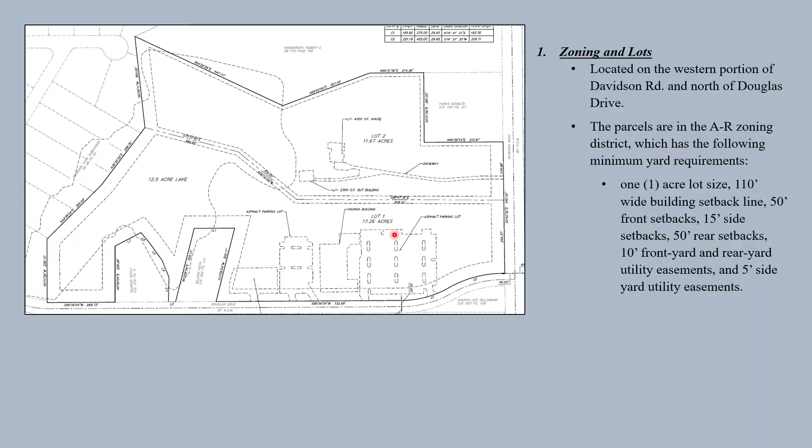So through here we've got gas—this is a house here that someone could live in tomorrow, a very nice house with a nice outbuilding. Gas, water, and electricity are available in the vicinity of Davidson and Douglas. For transportation, you've got Davidson and Douglas for both lots. Both have paved driveways, no bond, no infrastructure needs to be recorded. They do not ask for any variances or deviations.

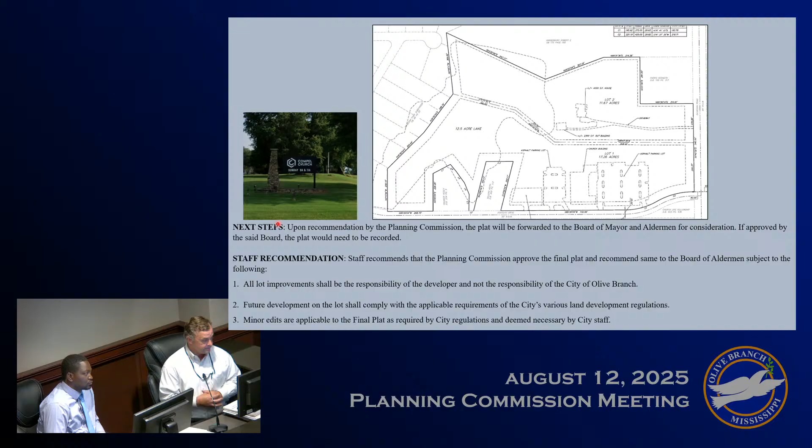Next steps would be, upon recommendation by the Planning Commission, the plat would be forwarded to the Board of Mayor and Aldermen for consideration. If approved by that board, the plat would need to be recorded. I've got three conditions here, and staff does recommend approval with those three conditions. That is staff's presentation, happy to take your questions.

Any questions of staff? If none, do we have someone here to represent the application? Nicholas Croonan, address 3629 College Road, South Haven, Mississippi. I have nothing else to add unless y'all have questions. Any questions, Mr. Croonan? No questions, then thank you.

We do not need a public hearing for the final plat, so I will now direct it to the commissioners for any comments, discussion, or motions on this application.

Make a motion to approve based on staff's recommendations. We've got a motion by Mr. Singh to approve the application subject to staff recommendations. Do we have a second? Second, by Mr. Jones. Any other discussion? If not, all those in favor signify by saying aye. Aye. Any opposed? The application is approved.

Thank you so much. Our last item is a motion to adjourn, unless we have any other discussion. I make a motion to adjourn. We got a motion by Ms. Singer and a second by Mr. Jones. All in favor say aye. We are now adjourned.